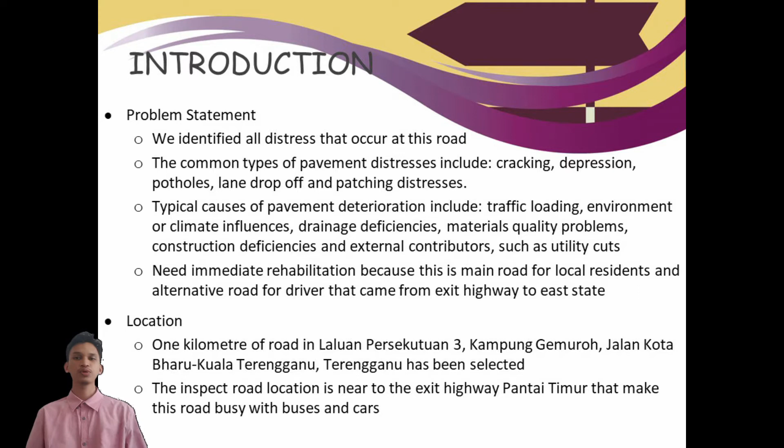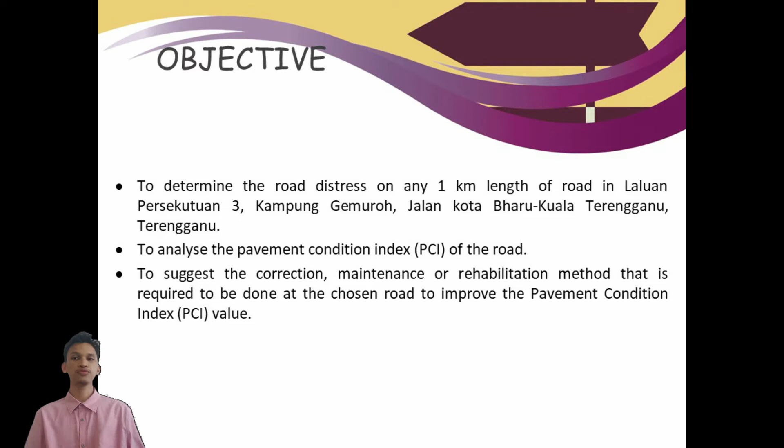The objectives of this project are: first, to determine the road distress of any 1 km length of road on Laluan Persekutuan 3, Kampung Gemuroh, Jalan Kota Bharu, Kuala Terengganu, Terengganu. Second, to analyze the pavement condition index PCI of this road. Third, to suggest the correction, rehabilitation, maintenance or any method required at the chosen road to improve the PCI value.

Hi, Assalamualaikum warahmatullahi wabarakatuh. My name is Muhammad Afiq bin Hamsan and I'm going to explain the literature review. Basics of the Pavement Condition Index PCI. The PCI provides a numeric rating for the condition of road segments within the road network, where 0 is the worst possible condition and 100 is the best.

The PCI is a subjective method of evaluation based on inspection and observation. While the PCI is based on subjective observation, the index itself must be both objective and systematic to be of value. A PCI should be based on: 1, manageable road sections; 2, road inventories; and 3, a classification and rating system for road defects.

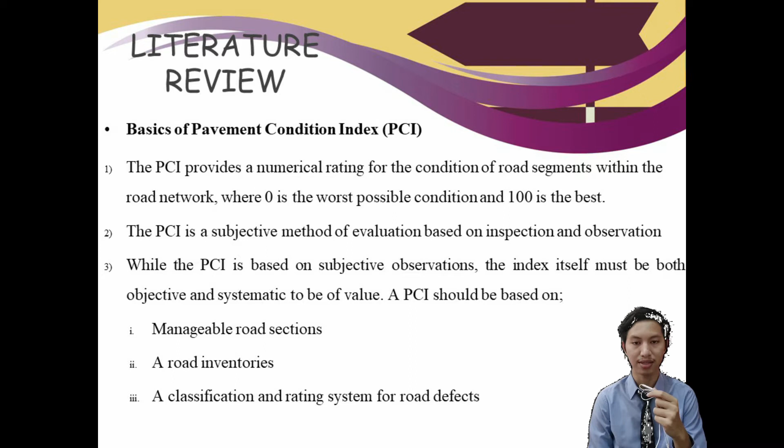Next, there are 7 levels in the PCI rating scale. As we can see, there are LOS A to LOS F, where 86 to 100 is LOS A, 71 to 85 is LOS B, 56 to 70 is LOS C, and so on. The table also states the maintenance that should be done for each level.

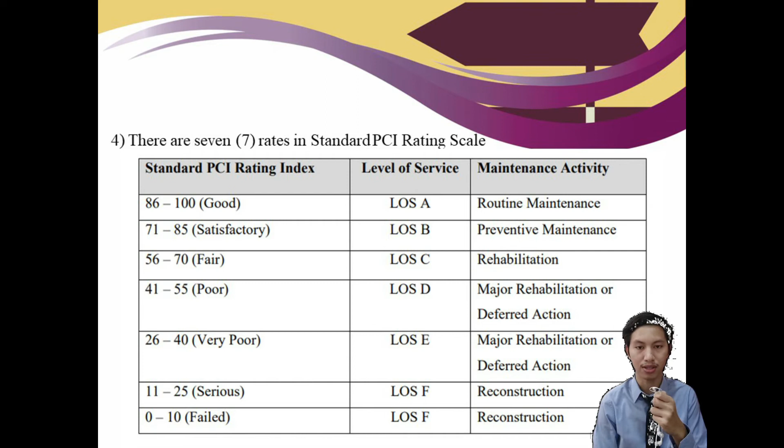Next is the limitation of PCI. Because it is a subjective method, being too lenient may mean important maintenance work is delayed. Being too strict may mean spending money on fixing a problem before it really needs to be done. Number 2, it deals with surface conditions only. Surface conditions are symptoms of underlying problems and need to be properly diagnosed.

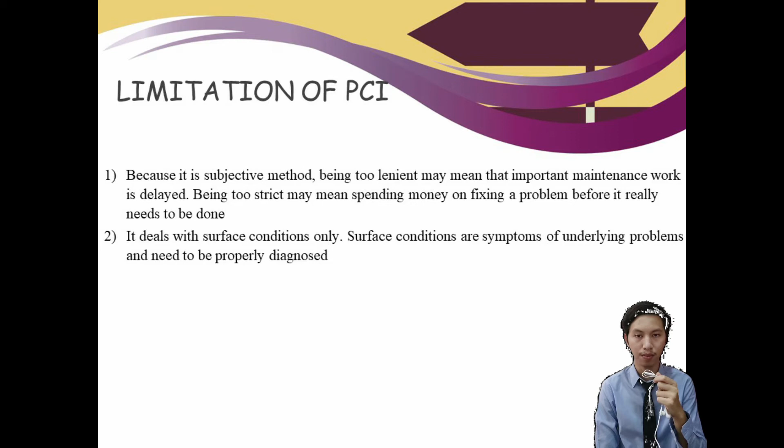Bismillahirrahmanirrahim. Assalamualaikum warahmatullahi wabarakatuh. My name is Muhammad Shukri bin Jalal and I'll be presenting the methodology. In the methodology, I will explain the process of road selection, classifying the road defects, and the procedure to calculate the PCI value. Firstly, for road selection, this project was held during the COVID-19 pandemic, so all procedures were done using online platforms, namely Google Maps and Google Earth.

We chose Laluan Persekutuan 3, Kampung Gemuroh, Jalan Kota Bharu, Kuala Terengganu as our road for the PCI. The reason we chose this road is because there are many types of distress along 1 km of this road, for example potholes, alligator cracking, depression, edge cracking, patching, and more. The pictures of the starting point and end point of our road are also shown.

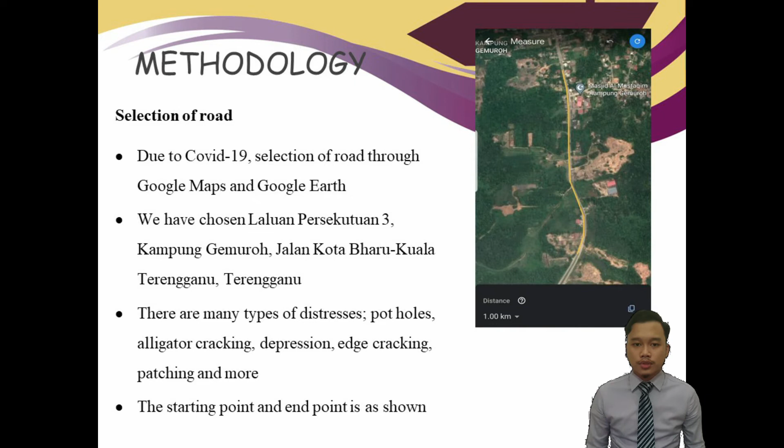Then, we plotted 11 points, and the distance between each point is 100 meters. That means we divided our 1 km road into 10 sections of 100 meters each. The sections are as shown.

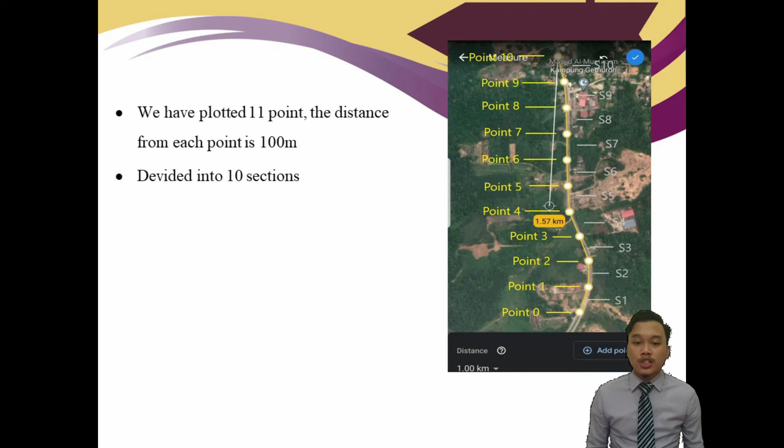And then, we move to the process of classifying the road defects. After the road had been divided into 10 sections, the process of classifying the road defects was conducted. The way is, each group member will do the identification of distress at 2 sections. The identification is based on the type of distress and also the severity of the distress. And then, the data will be recorded in the data sheet.

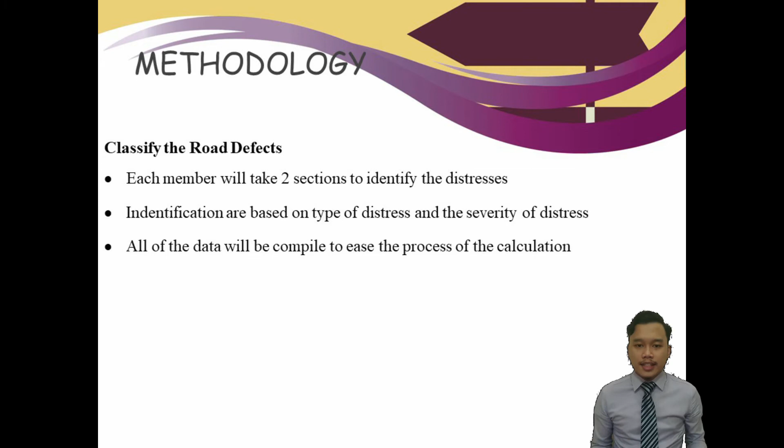And after compiling, we have evaluated at which section or which point we need to focus on when conducting the PCI test. Next, I will explain the procedure to calculate the PCI. Firstly, we need to inspect the sample unit, determine the distress type and the severity level of the section, which are low, medium or high.

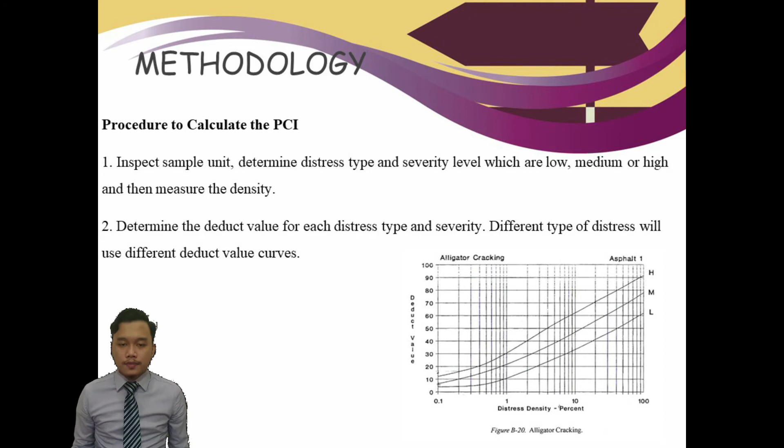After we know the type and severity of distress, we can measure the density by using the formula. And then, we need to determine the deduct value for each distress type and severity level. Different types of distress will use different deduct value curves. The example of deduct value curve is as shown. Next, we need to sum up the deduct value. So, we will get the total deduct value.

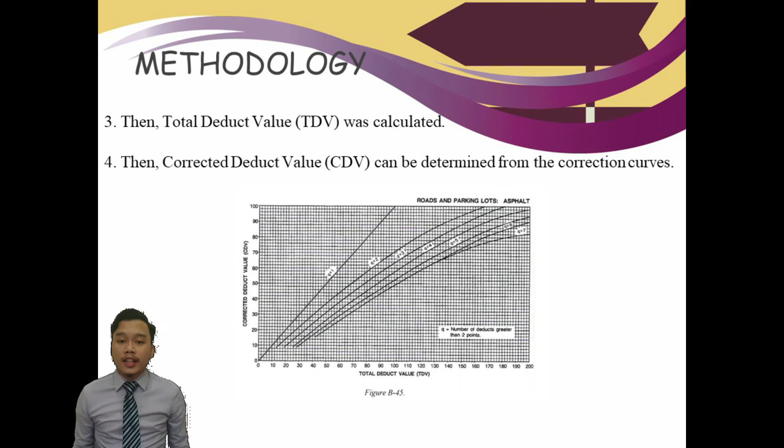And then, we can know the value of corrected deduct value after we calculate the total deduct value. The way is, we need to use the correction curve. The correction curve is as shown. And then, the PCI can be calculated by using PCI equal to 100 minus corrected deduct value. The level of service and the condition of the road can also be known from the PCI value. We can refer to the figure as shown to know the condition of the road and the level of service.

And lastly, if the survey sample units are selected randomly, the PCI of the section can be determined by averaging the PCI of each sample unit.

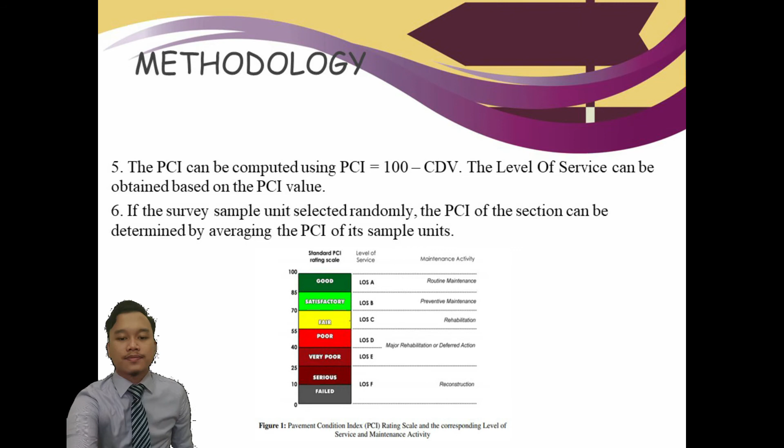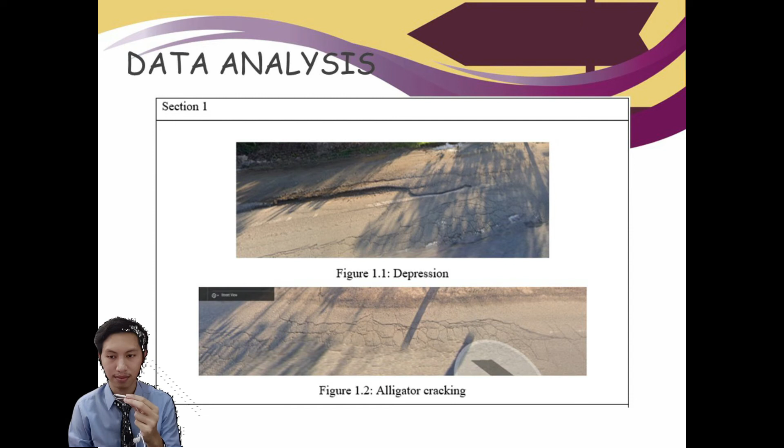For data analysis, we did our survey on Google Maps and we found several distresses that need to be labeled and calculated. In point 1, we found depression and alligator cracking. In point 2, we found potholes. In point 3, we didn't find any distress. And in point 4, we found joint reflection cracking.

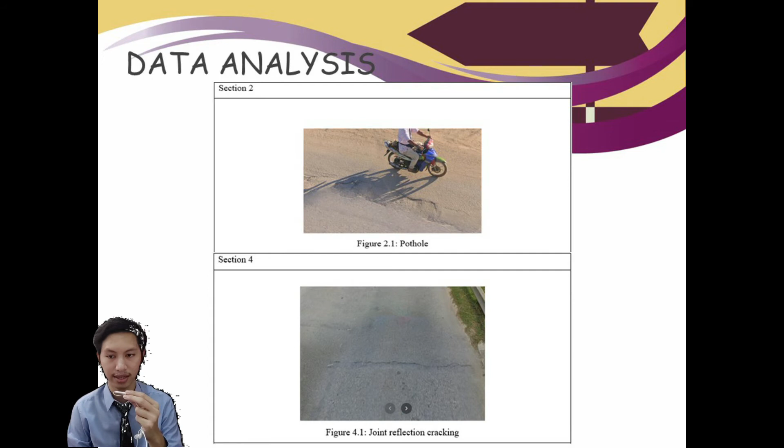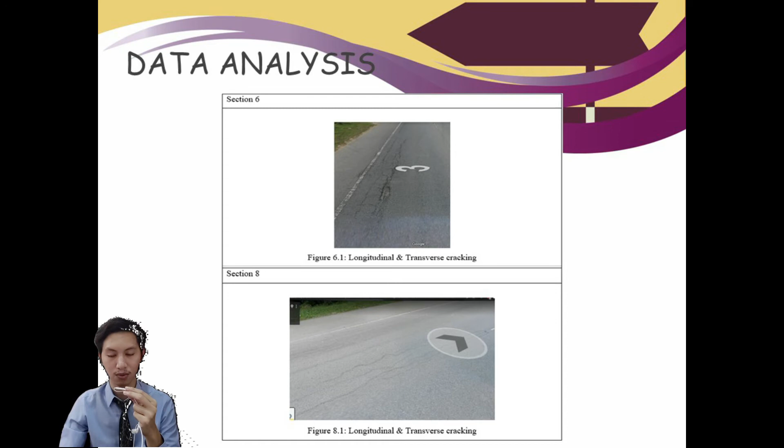In point 5, we found edge cracking and alligator cracking. In point 6, we found longitudinal and transverse cracking. And in point 8, we found the same distress, which is longitudinal and transverse cracking. In point 9, we found patching and utility cut patching and lane shoulder drop off.

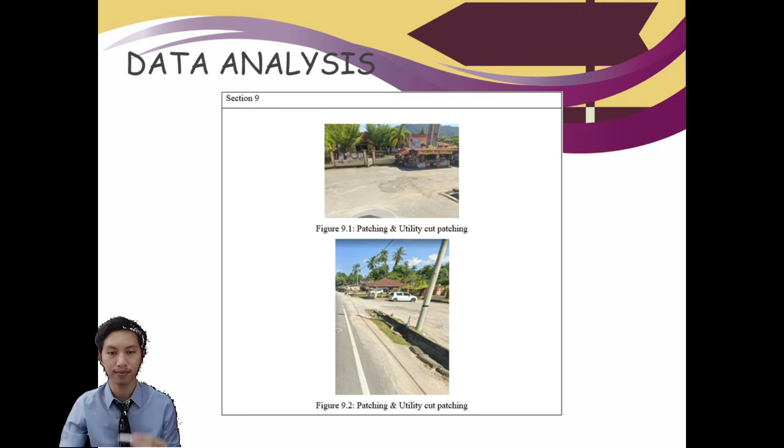Assalamualaikum, my name is Muhammad Fahmi and now I will present the discussion on the result. So for raw data, capital N represents the total number of sample units and lowercase n represents the number of sample units to be surveyed. So our capital N value is 10, and from the graph for selection of the minimum number of sample units, we get the lowercase n value of 6.

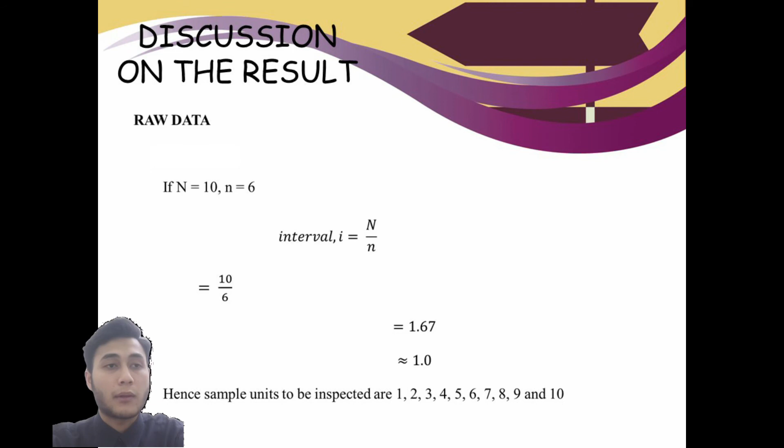Next, we put the data in the formula, which is I equal to uppercase N divided by lowercase n, and we get the answer 1.67 and choose 1 for the interval. Hence, sample units to be inspected are 1 till 10. Now, for example, unit 1 calculation. From the distress survey, we have found 3 distresses on the road.

From the table, we can see code 01 is for alligator cracking and the distress is medium level. We have 2 alligator cracking distresses. The area for the first alligator cracking is 2 square meters and the second one is 3 square meters. So the total area is 5 square meters. Then we have to find the density using the formula. 5 is the total distress area for this distress and 600 is the total area of the section.

Next, to get the deduct value, we have to refer to the graph distress density for alligator cracking, and we will get the answer is 20. Next, calculate the second type distress. From the code table, 06 is depression type of distress, and the quantity is only 1. The area is 2 meters square, and find the density using the formula, and the answer will be 0.33. And the next step is to get the deduct value by referring to the graph distress density for depression, and we will get the answer is 8.

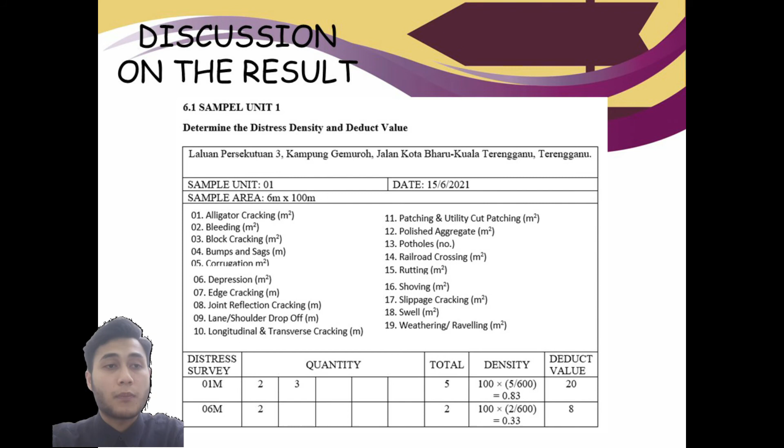Now, we have to calculate maximum allowable number of deduct. From calculation before, highest deduct value is 20. Put the value in the stated formula, and the maximum allowable number of deduct will be 8.3. Arrange deduct value in descending order, which is 20 and 8, so the number of deduct value is 2. Since the maximum allowable number of deduct is 8.3, therefore only the first 8 and 0.3 of the both deduct value are selected, which is 20 and 8.

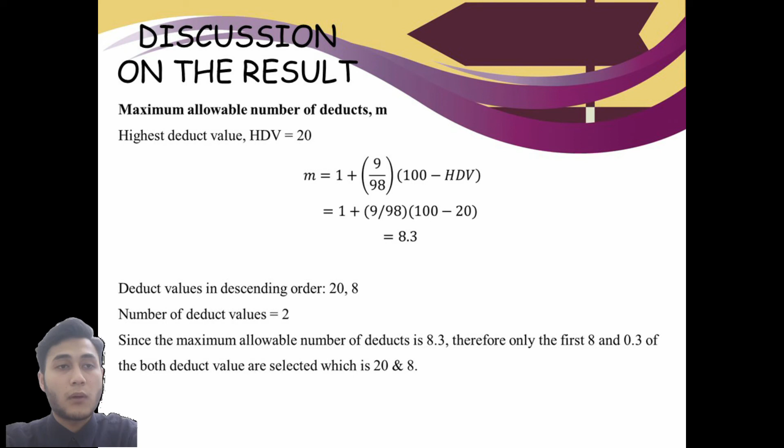Next, we have to calculate maximum corrected deduct value, CDV. From the calculation, number of deduct value greater than 2 is 2, so Q value equal to 2. Total deduct value is 20 plus 8 equal to 28. From corrected deduct value, CDV chart, we get CDV value is 20. By referring to the calculation, first row deduct value is 20 and 8, the total will be 28. Q is 2 and the CDV is 20. For next row calculation, deduct value is 20 and 2, the total will be 22. Q is 1 and the CDV is 14. So the maximum CDV value is 20.

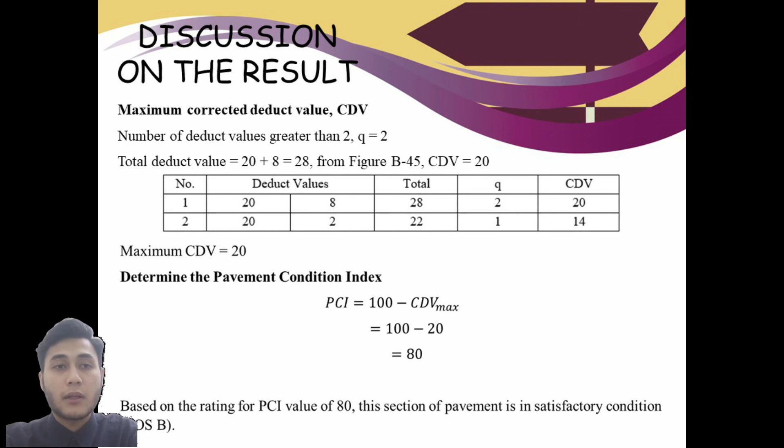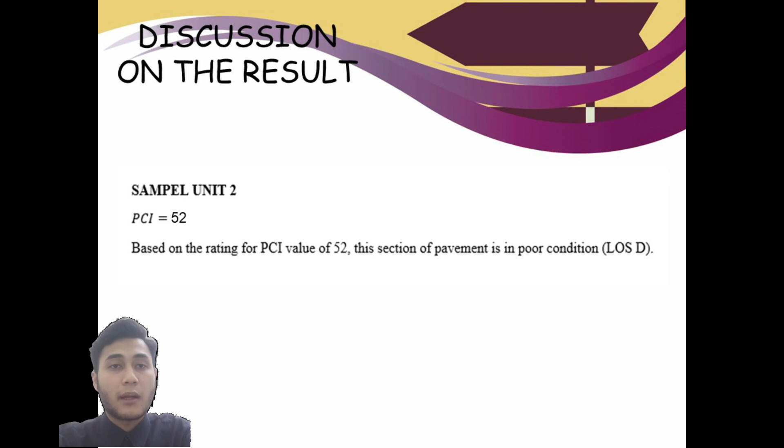Next, we have to determine the pavement condition index, PCI. Using the stated formula, the PCI value is 80. So based on the rating for PCI value of 80, this section of pavement is in satisfactory condition, LOS B. Next, by repeating the same step for other sample units, we will get the PCI number for sample unit 2 is 52, sample unit 4 is 94, sample unit 5 is 86, sample unit 6 is 70, sample unit 8 is 92, sample unit 9 is 91. The other sample units that are not calculated are because there are no distress in that section.

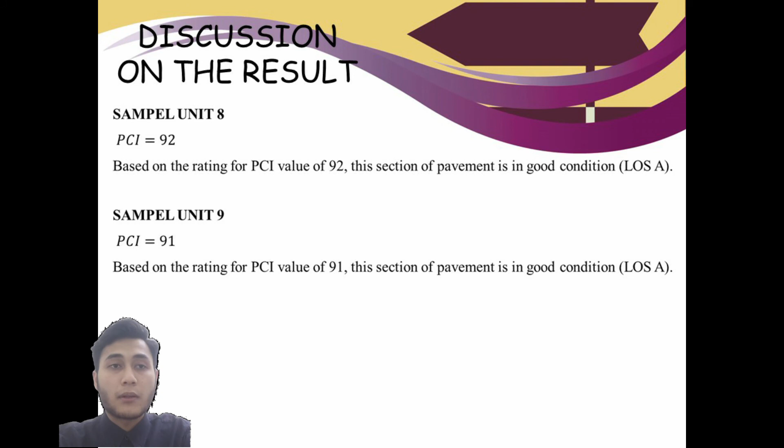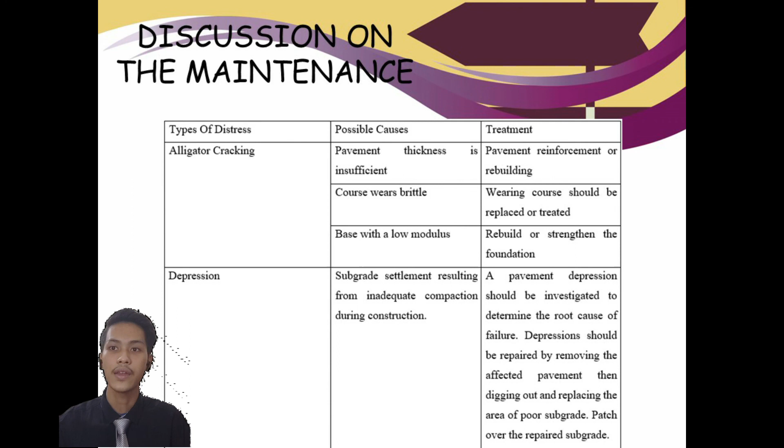Assalamualaikum, my name is Arifan Nafidi bin Abu Bakar, and now I will explain about the discussion on the maintenance. There are only 4 types of distress that I will explain for this video. The first one is alligator cracking. The possible cause is base with a low modulus, and the treatment is rebuild or strengthen the foundation. Next, it is depression. The possible cause is subgrade settlement resulting from inadequate compaction during construction. The treatment is by removing the affected pavement, then digging out and replacing the area of poor subgrade.

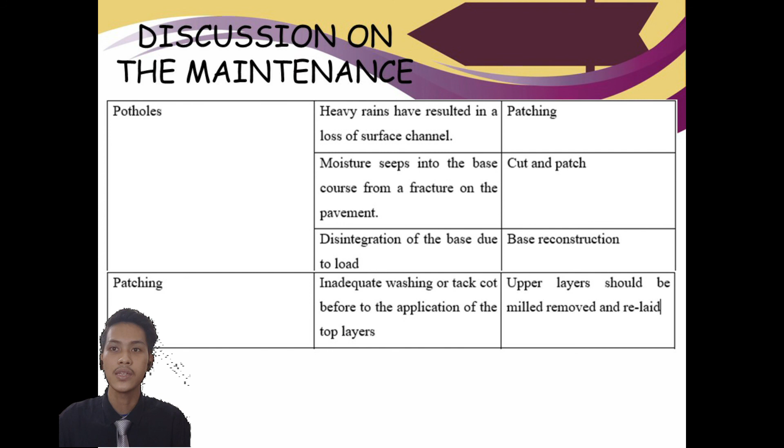The third one is pothole. The possible cause is disintegration of the base due to the load, and the treatment is base reconstruction. The last one is patching. The cause is inadequate washing or tack coat prior to the application of the top layers, and the treatment is upper layers should be milled, removed and relaid.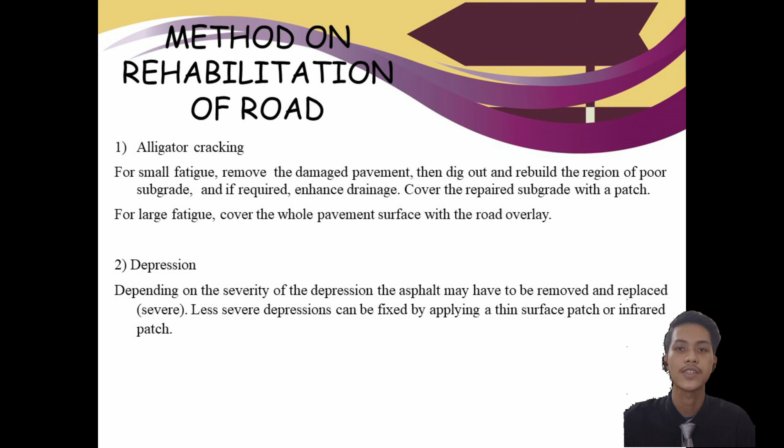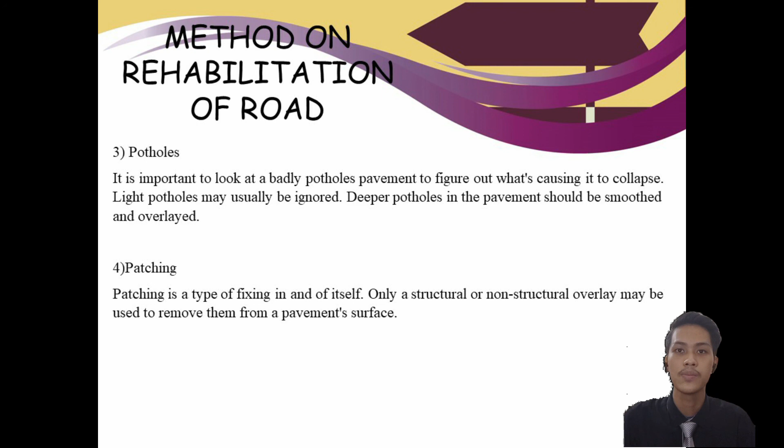Okay, next I will explain about the method on rehabilitation of road. The first one is alligator cracking. For small fatigue, we just remove the damaged pavement, then dig out and rebuild the region of poor subgrade. For large fatigue, cover the whole pavement surface with the road overlay. Next is depression. Less severe depression can be fixed by applying a thin surface patch or infrared patch. Next is pothole. Light potholes may usually be ignored, but deeper potholes in the pavement should be smoothed and overlaid. The last one is patching. Patching is a type of fixing in and of itself. Only a structural or non-structural overlay may be used to remove them from a pavement surface.

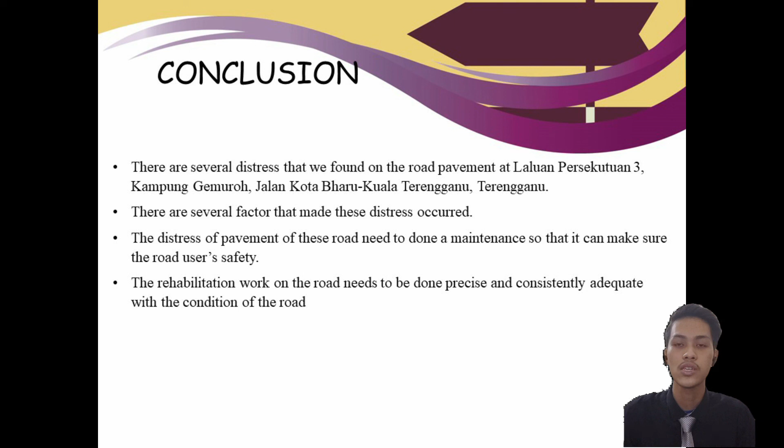Okay, lastly, I will explain about the conclusion. There are several distresses that we found on the road pavement that we have chosen before. There are several factors that made this distress occur. The distress of the pavement of this road needs maintenance to be done so that it can make sure of the road users' safety. The rehabilitation work on the road needs to be done precisely and consistently adequate with the condition of the road.